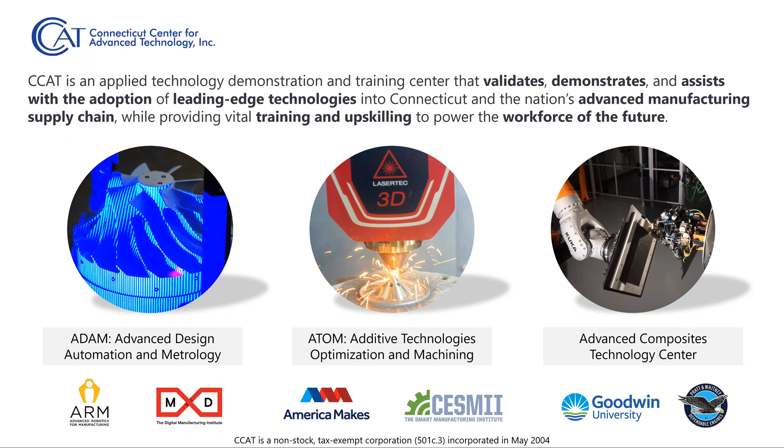So anyways, we have a diverse portfolio, and our tech centers, for those that have not seen it in person, we have our advanced design, automation, and metrology side of the house focused on model-based definition, inclusive of digital thread. So for the Naval Maritime population, we'll be digging into that this afternoon. Generative design, both for design for additive as well as what you might need in the digital model-based definition space.

Industrial IoT, we have a collection of metrology systems here, and our colleagues are going to speak to you about some of those that are in-house here at CCAT at our tech center. And then additive technologies, I've shared that we've done that for quite some time, and we have a large, diverse portfolio. So there's 7 different families of additive technologies, and here at CCAT, we have 5 plus hybrid. Hybrid allows you to do both additive and subtractive in an all-in-one machine. That is our most popular machine.

If we had 4 shifts and 5 people working that, that would be phenomenal, but we move ahead. So if hybrid is in your space, or you don't know what hybrid additive is, you're certainly in for a treat. But we're not here to talk about that today.

We're here to talk about model-based definition. So, and also digital thread.

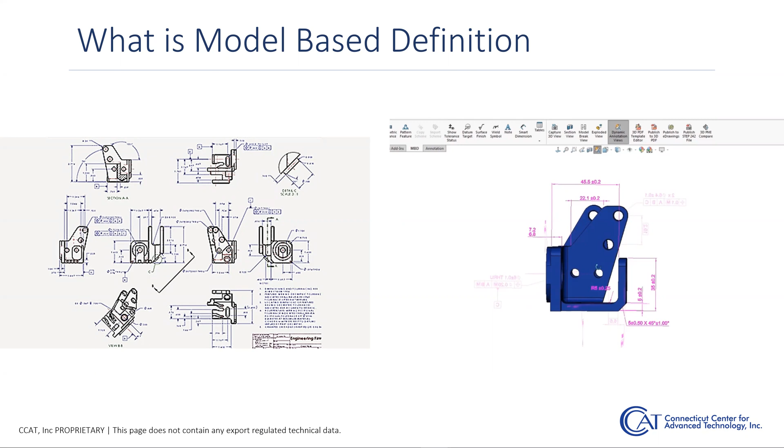What is model-based definition? To me, for the supply base, model-based definition is the consumption of PMI to automate processes. On the design side, design engineers have had the ability to put on 3D annotations for more than 10 years, right? But for you as a supplier, when you're actually looking at producing the part, the biggest benefit to you is using that data to automate processes. I'm going to touch upon some of the technologies that help you do that, and then our technology partners are going to go a little bit deeper to show you how that's done.

Once the OEM releases that technical data package to the supply base for quoting, what we are aiming to help set up is your ability to take that data directly into some kind of a data management system, such as EPDM from SolidWorks, or Teamcenter from Siemens, or many other systems out there. In a simple sense, you can think of this system as kind of like Microsoft Teams, where a Word document is housed in Teams, and multiple people can access that file, make changes, and coworkers can see those changes in real time.

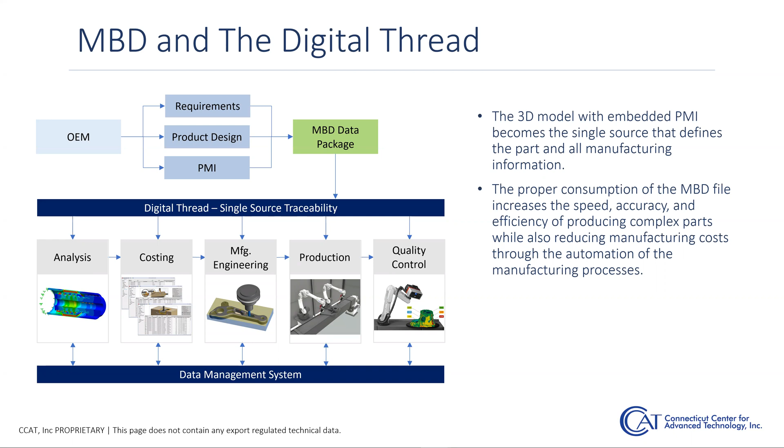And now that data that's been added to that technical data package is now available for the costing, manufacturing engineering, production, quality control. So as I said, we're going to be concentrating today on a couple of key aspects. But before I get into which ones we're going to be concentrating on, let's take a step back and take a look at the reality of digital thread and model-based definition, and really the benefit that it provides to you.

So I'm going to take the example of a particular company that exists. You may or may not have heard of a company called Protolabs or Xometry. I use Protolabs as an example because I tried them, and I wanted to see how a digital process actually benefits me as a customer. And so what I did was, I had a need to have a part produced.

My first step in order to receive a part was to upload the CAD model. And I can upload it in several different formats. Now, at the time, I didn't upload a model-based definition file. However, I uploaded a CAD model, which for me held the intent of all the design aspects of what I wanted that part to be. So I didn't have a separate drawing that specified anything extra in terms of the nominal dimensions of the part that I wanted.

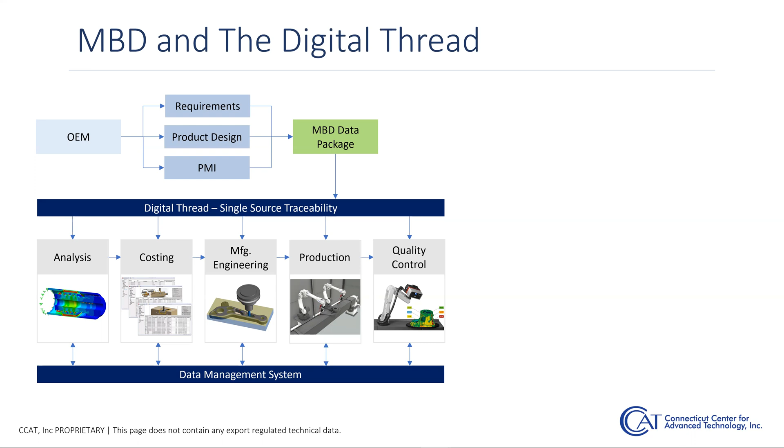So, as I said, there are many different components to a manufacturing company. And I'm not listing them all out here, but today we're going to be focusing on costing, on manufacturing engineering, and then quality control.

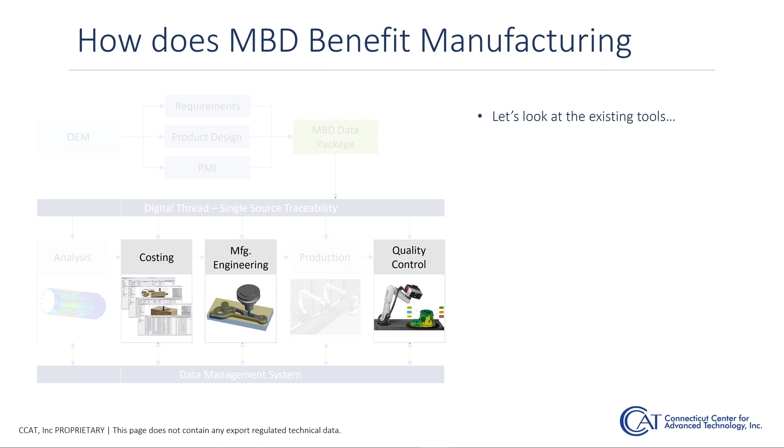Their technology can help simulate the manufacturing process. So aPriori provides accurate analysis of real-world manufacturing to provide design for manufacturing insights and cost estimates. And then you can actually simulate costs using digital factories. So region-specific digital factories to simulate process costs in various different regions of the world.

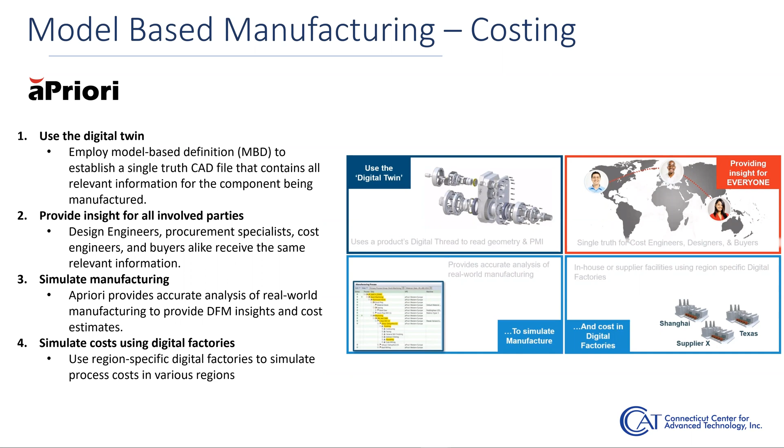So in this particular case, they have something called tolerance-based machining. And in the tolerance-based machining dialogue, you can set up different strategies per tolerance range. So what that means is that, for example, if I have a tolerance range between, let's say, 0 and 2/10,000ths of an inch, I may want to specify a strategy that says, okay, use a spot drilling operation, and then a drilling operation followed by a reaming operation, right? Or a single point boring operation.

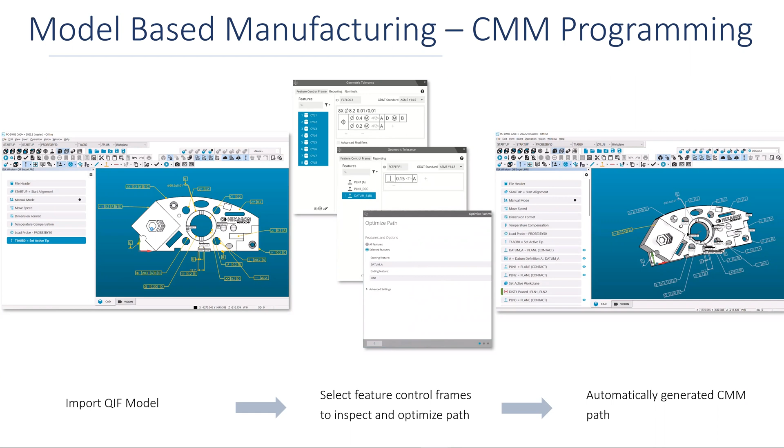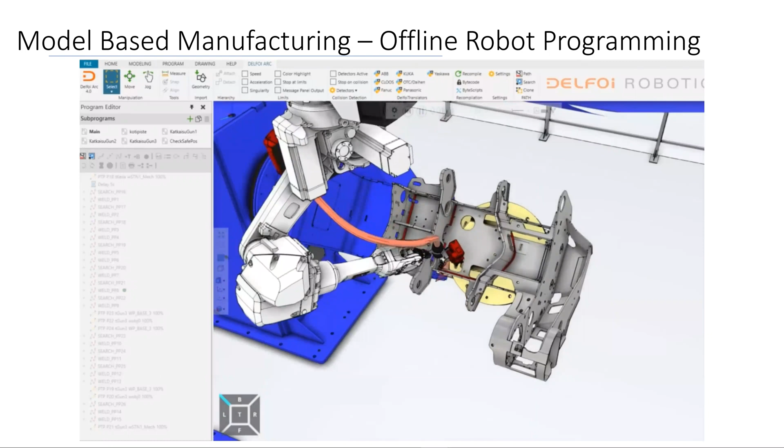With welding applications, there is software if you're doing any kind of robotic welding. Offline programming software can import model-based definition. You're going to hear actually a lot more from the Capvidia folks about this, probably more particularly during the lunch and learn. But there is the ability to import MBD files with the welding callouts, and this can actually be used to generate welding paths in an offline programming environment.

For real-time robot programming, we do have our technology partners here today, Scalable Robotics. Again, they're set up over by the additive flex cell on the Atom Lab side, and they're going to be demonstrating their solution of creating a weld path using a scanning device that's attached to the robot. It actually goes over the scene, takes a quick scan of your environment.

And then they have the ability to use a device that you see there on the right with a fiducial marker on it, and you just go and click on the seam, a couple of points, how you want that robot to follow the path, and then the robot generates that path, and you can just execute it. So it's a very, very quick and easy, and really code-free, way of programming ABB robots.

So as I said, we do want you to see a little bit more in depth how these technologies can be used to automate costing, CNC programming, inspection programming. And so we do have our technology partner with us today. I'm going to shortly invite aPriori up to talk more in depth about their solution.

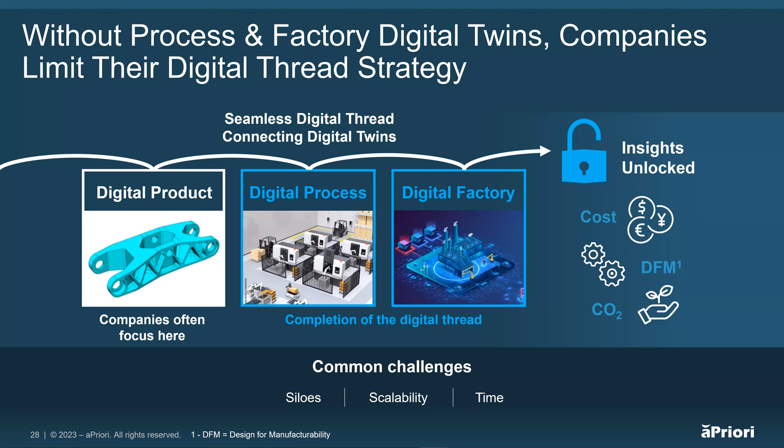So it really begins with a digital factory definition. So digital factory, basically, we have 80 different regions across the globe, about a dozen locations regionally within the States here, where on a quarterly basis, we update labor rates, overhead rates, material costs, all your energy factors. And that's a starting point. Our customers will configure those to match their capabilities, the machines in their facility, for example, their purchasing power over materials. We take that digital factory definition, and now we consume the CAD models, the parts, the assemblies, all the MBD and the PMI information on that in terms of tolerances and surface finishes, and really leverage that and combine it with our ability to simulate the manufacturing process.

So what is the raw stock that I'm starting with? How much material is being removed for every feature? That hole has a 5/10 tolerance on it. That's going to drive a reaming operation, for example. So with that simulation, we then can review these insights, look at it both from a cost standpoint and manufacturability standpoint, and take action. Ideally, early on in the process, when you can make changes interactively with CAD and see that impact to cost.

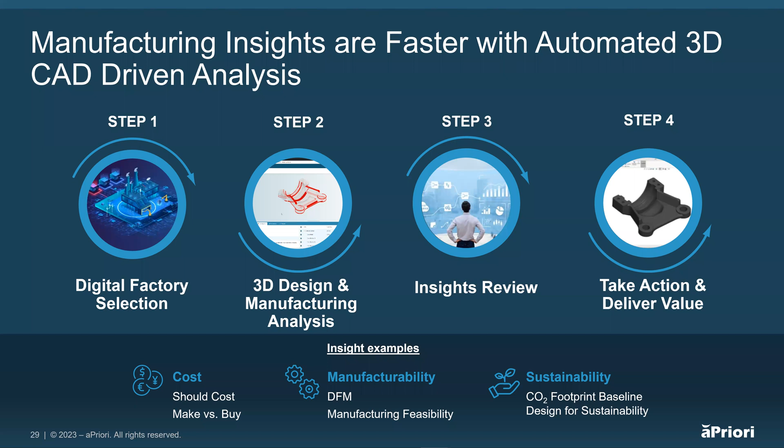So the idea is, and I'll show a short video here in a minute, but really being able to get to a detailed cost breakdown. So this part, what's the contribution of material, labor, overhead, capital investment? Is there tooling required? Is this an injection molded part that requires $40,000 worth of investment, or a casting, for example? And provide design guidance.

So young engineers, they can make parts look pretty and design great parts, but is it manufacturable? Are there going to be some features on that part? Length to diameter ratios, long skinny end mill required to get into a corner, or a sharp corner that can't be manufactured, that might have to be burnt. That kind of information. And then throughout the application, providing information on why that's a problem and how you would go about fixing it. And you start this iterative loop back to CAD to fix those issues.

And then the third block that you see here, manufacturing feasibility, right? Where is the cost in the overall process coming from? All of the equipment is being selected from the digital factory, and understanding of the cycle time, the high costs, and also looking at what equipment is feasible to manufacture the product in the most economic way. A shop may not have the right equipment.

So on the supplier side, looking at what sort of capacity is going to be required, how many hours on this particular machine is going to be required. Should I be quoting on this job? Am I really set up for it? And if I am, what sort of cycle time can I expect for this really early on in the process?

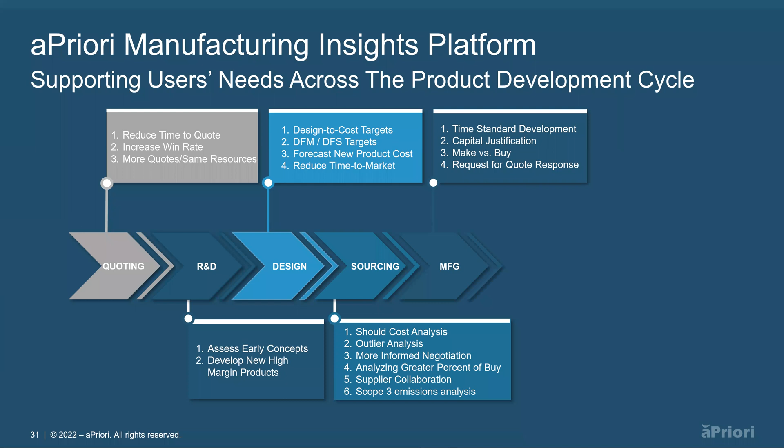On the manufacturing side, we have use for understanding, does it make sense to bring in a piece of equipment, for example, or make versus buy capabilities? You may have the capabilities in-house to build something, but you may not have the capacity, and it may be justified to send it out. So it's another area. And then, as much as everybody likes to get it right on the front end, there's always cost down initiatives, especially on long programs, 20-year cycles, product constantly being redesigned, looking for opportunities to continue to drive cost out.

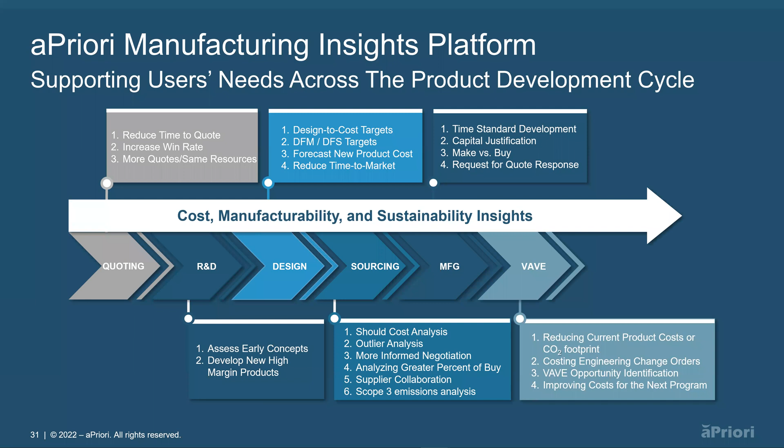So those are really the areas that we look at in terms of the application of the technology. It's really all about starting with leveraging that digital thread to provide that cost and manufacturability insight. And at the end of the day, we've expanded our capabilities, in particular over the past couple of years, to integrate with PLM systems so that when you check a design into Teamcenter, for example, or Windchill, all this analysis is happening in the background.

So all the parts are being crunched at night, and designers are now looking at automated emails where they can see the outliers, which parts are over a target cost or which ones have the biggest chance for manufacturability issues. So part of the platform is an analytics platform. So target cost, right? So here's my project, here's what the target is, and here's where I stand relative to that, so that you can make sure that you're on track and then focus on the areas that are most problematic.

The design outlier, right? The size of the bubble is the annual spend. Each one of those represents a part. It's actually a cost versus weight graph. The color of the bubble is indicating manufacturability risks. So the parts with the dark purple have the highest risk. They've got sharp corners in them, or sheet metal parts with bend radii that are too tight, that are going to ultimately result in changes coming back, or hopefully not getting to the supplier and not showing up as not being manufacturable.

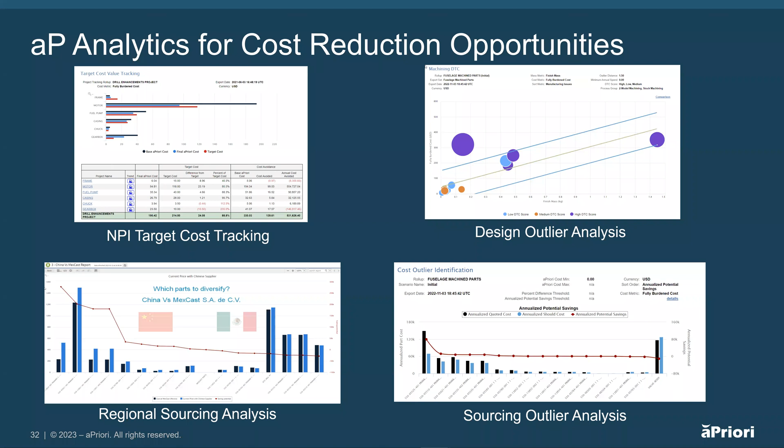And then regional sourcing, looking at all the different places that it could be sourced from. What's the most economical decision to make there? And then this last one here on the bottom right, sourcing outlier. So loading in what you're currently paying for a part compared to what the should cost could be, so that you can look at the parts that have the biggest difference. Those are the ones that you should pick up the phone and have a discussion with your supplier. Something's wrong. Maybe they're justified, but maybe the equipment they're using is way more capable than necessary. So that allows that fact-based discussion.

So with that said, let me just play a quick video here and give you a view of it in action. There's some voiceover, but I'll skip that. Let me see. There we go.

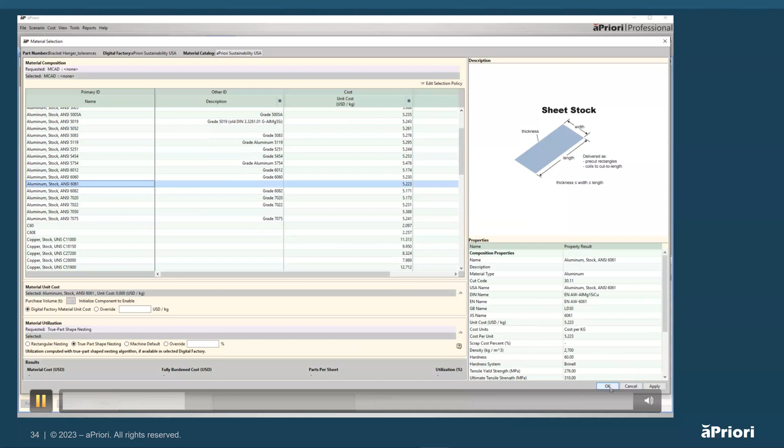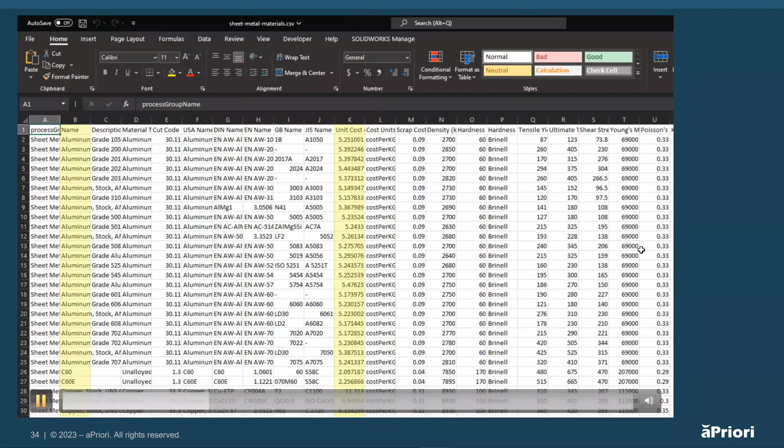So some of our customers know the capabilities of their factory, the machines. The digital factories can be tailored to specifically match a supplier if you have that relationship, that insight, or an internal factory, to really hone that factory in. And part of that is all of the materials and, of course, the cost per material, but also mechanical properties that are used in the manufacturing simulation. And all of the different grades of materials that are specific to the manufacturing process. So if I'm looking at an injection molding process, I'll see all those. All the data can be imported and exported as necessary through Excel.

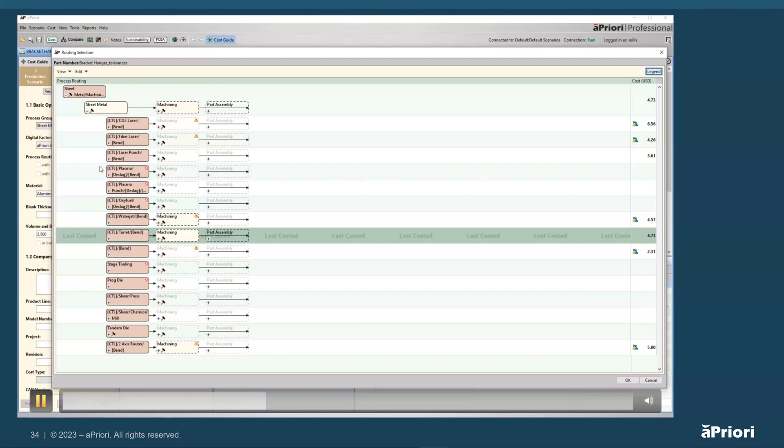And then lastly, how many am I making and for how many years? So understanding the batch impact, which can have an impact on the overall cost of the parts. And then the simulation goes and does its thing after answering those few questions. And you can see here that this sheet metal part is going to a turret press and then a 3-axis mill. So we've actually analyzed all the different ways. So is this going to a laser and a bend? All the different manufacturing processes, it looks at the feasibility and then the cost, and selects the most cost-effective approach.

So in this case here, you can see this is a list of the machines that were cycled through in order to get to the turrets here, and it's selected first off, is it capable? And then the most appropriate from a cost standpoint. And you can see the cost breakdown here with material, labor, overhead, all of your cost breakdown. If there was a capital investment as well in terms of tooling, that is captured, basically within a couple minutes of pulling the CAD model in and running it.

The design guidance provides information on potential manufacturing issues. In this case here, there's an edge proximity. So I've got currently 2 millimeters, it's suggesting that you're at least 3 millimeters from the edge. And here's why that's a problem. So that gives that insight to the young engineers that may not necessarily have a full understanding of all the design rules. And here you can see the MBD.

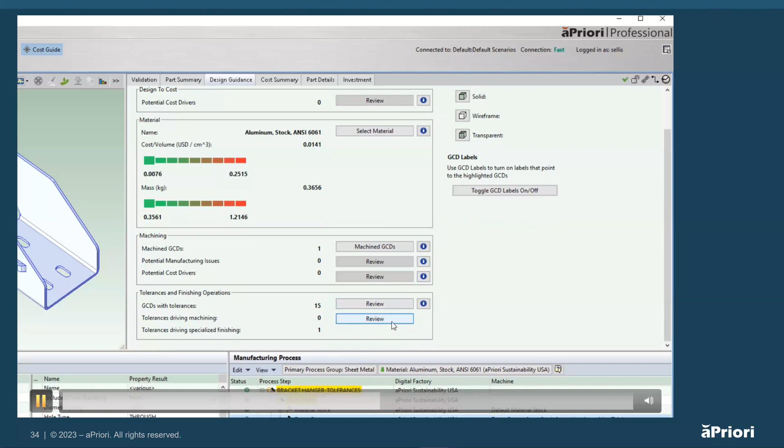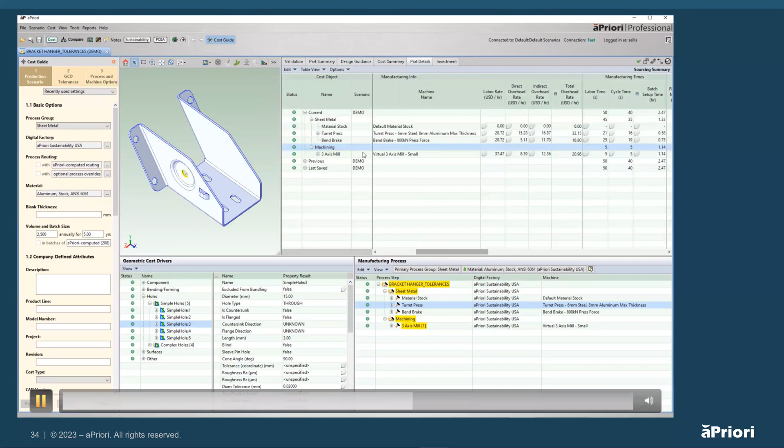So tolerances were pulled in, and this machine, the turret, can hold a 0.07 millimeter, but the tolerance is at 0.02. So that drove a reaming operation on a 3-axis mill. So if I could loosen that, I could eliminate having to get that to the 3-axis mill, the setup, and all the cost associated with that.

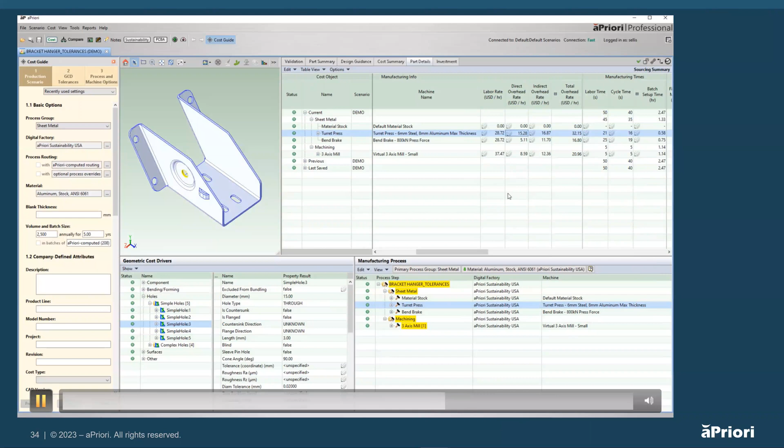And all of these assumptions that are made from the cost model, sometimes you'll want to dig into the details. All the detail, in this case the overhead breakdown. So the energy cost, depreciation cost of that equipment. And if I want to go in and have a discussion with a supplier: okay, instead of $28, you're at 40, okay, I understand the reason why, and update quickly to understand that.

And then here, lastly, jumping into electronics. So that's a big space for us as well, PCBA and wire harness. We integrate with a system called SiliconExpert that you load a bill of material into, and this system provides feedback on minimum and average price for those components.

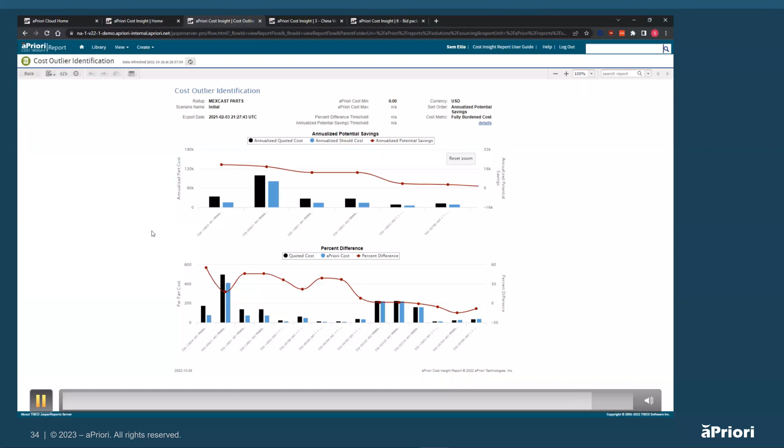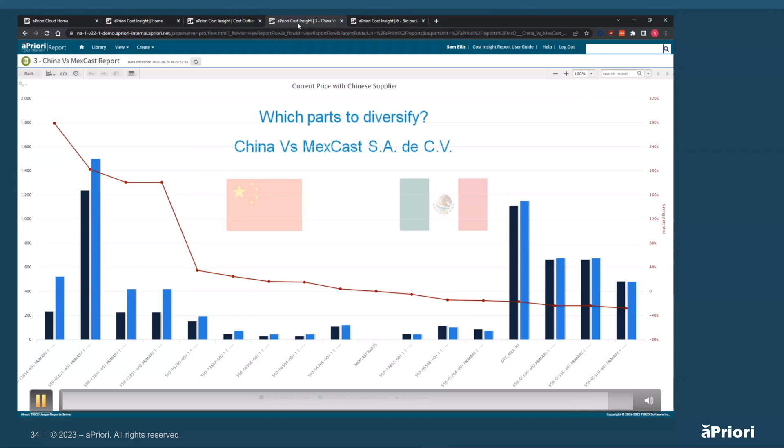And then it kind of wraps up with, okay, we've analyzed all these parts in the simulation. Let's now make some decisions around it. Focus in on the parts, in this case here, should cost versus quoted cost to know which ones you're overpaying for, or here an analysis of China versus Mexico on a variety of parts. Does it make sense to reshore?

So a quick overview, but the idea is really to leverage the model-based definition and the digital thread to provide cost and manufacturability feedback early on in the process for a variety of use cases. Thanks.

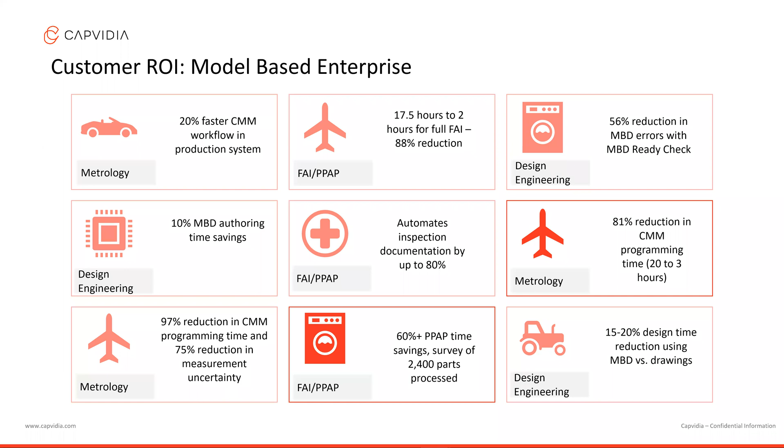But especially today, we're going to start on a real high-level workflow that Rudy's going to show, which is usually kind of a first step of how you could start to use model-based definition and derive some value for your organization. Just a quick background on Capvidia, on our products. So we'll be focusing today on our MBDVidia technology. We also have our CompareVidia technology, which is a comparative validation and CAD checking tool.

Basically, the idea being that if you want to use the model as your single source of truth, you want to make sure that it's a high quality model, since you're basing so many processes off it. So that's what CompareVidia is focused on. But today, again, we'll be talking mostly about our MBDVidia technology.

An important aspect of model-based definition is standards. Something that you'll hear a little bit about today is the QIF standard, which is an ISO standard that helps to tie the design world, so your CAD and your PLM product definition data, to your quality data, which is your as-built data.

So, at the end of the day, what this helps with is you have your as-designed model, you have your as-built data, and this is how you unify these things. So you hear people talking about digital twin. This is one of those ISO standards that's out there that really helps you realize that. And with that, I'd like to just pass it along to Rudy, and he can kind of walk us through this workflow.

Thank you, Daniel. All right, guys, we'll spend a little bit of time going through the workflow here that Daniel was talking about. I have a quick video. I'll just browse through this chart real quick. So we're going from the CAD all the way down to CMM inspection. That's where the guys from Hexagon will be taking the presentation, showing you what and how the inspection will go and sourcing that MBD data. So let me go to the next slide here.

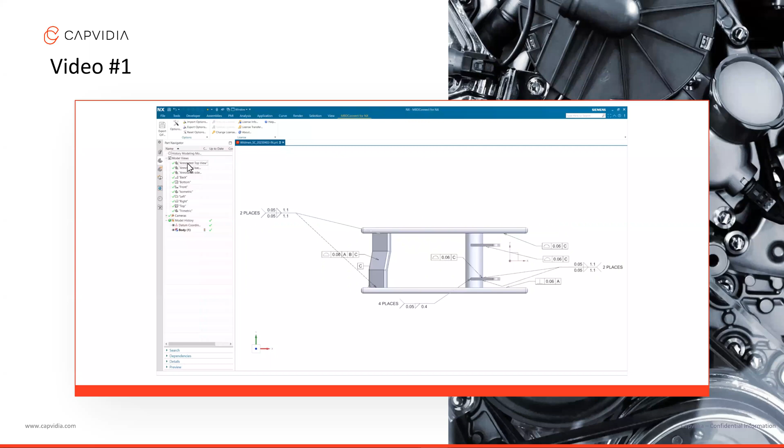Perfect. Okay. So we'll start at the CAD level. In this case, we'll be showing NX, but this can be done in any CAD. It could be SolidWorks, it could be Creo, CATIA. We're bringing in a CAD, and once again, it's MBD, right? It's all defined in the 3D space. In this case, just to highlight, we do have welds, just specific for this model, just a weldment. You saw the demo done by the guys at Hexagon over here. That's the part that we're showing here, right?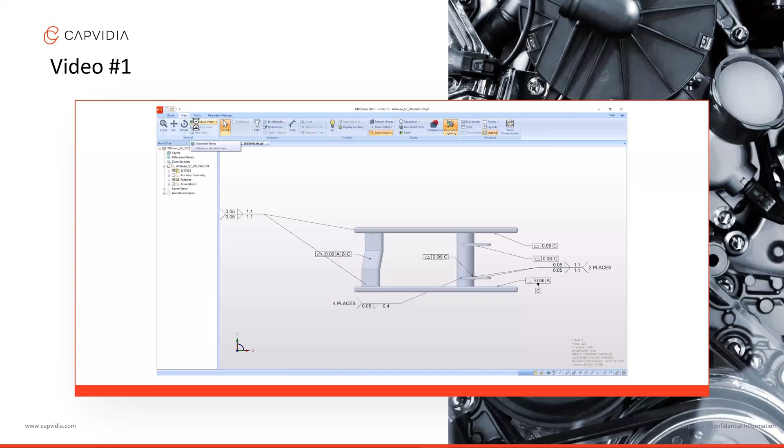Importantly, we're going to be exporting this file as a QIF standard. That was what Daniel was talking about. This is a standard that brings in the CAD and also the PMI. So all the GD&T will be all put in one single file. After that, we're going to be bringing that over to MBDVidia, which is our core software. You can see here, we're just having the same exact CAD geometry and the views and all the GD&T that you saw at the CAD level, in this case, NX. All the views are shown there.

Now to highlight is that after that's been done, we went ahead and characterized each one of these items. So now each one of those GD&T callouts has a designation, a character number. Very important to show, and I'll show it again in the next couple of views, is that each one of those holes that you saw, there's 12 holes, has a sub-character number. So it's going to be traceable throughout the workflow. Very good. There we go.

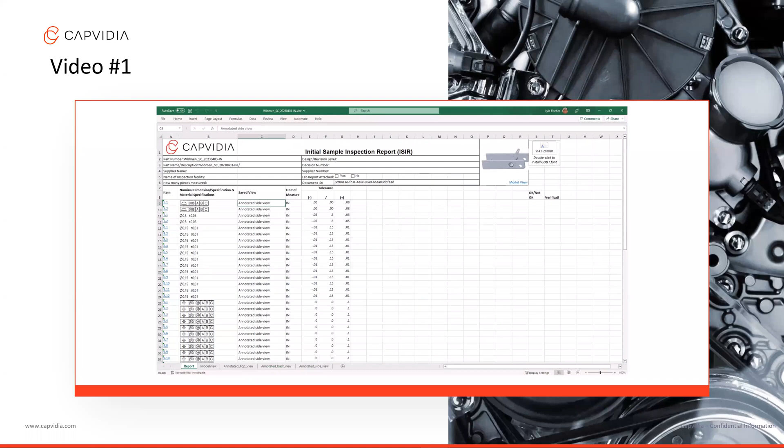After going through this, we're going to be exporting this into Excel. This creates an inspection plan. So if you guys have worked in quality, you've seen these extensive inspection plans where it includes all the dimensions, the results and everything. It could be an AS9102 report or just a standard format that you may have at your company. But what our software does, it actually exports that automatically into any format.

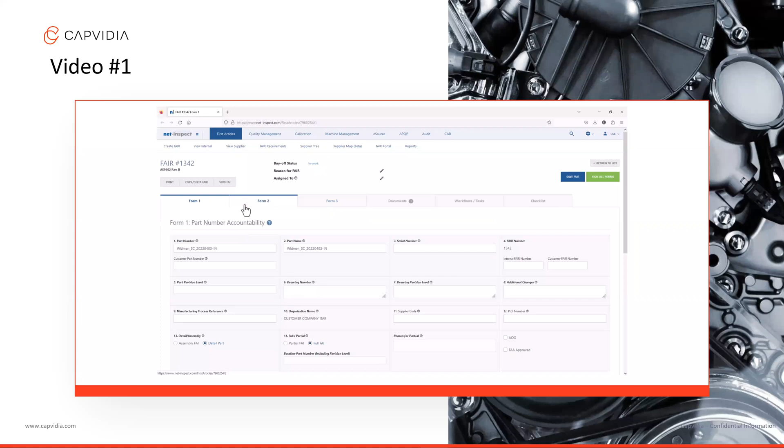Also, what we're showing here is this is exporting the data over to Net-Inspect. For those of you that are not familiar with Net-Inspect, Net-Inspect is a cloud-based QMS solution, and it pretty much automatically pushes all that data, all the GD&T, no manual input, up to Net-Inspect. This is very useful for your supplier base. If you have suppliers, they can submit their first article inspections to Net-Inspect, and you can approve directly from there. So we work together with them, and we have a very good relationship to manage all this data.

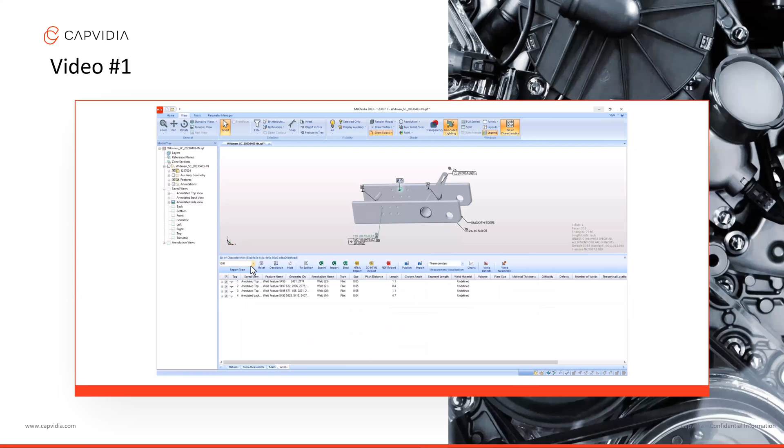So at this point, we'll bring it back into Capvidia. Really, the process could go either way. But here we want to show how we are segregating the welds as a different tab inside Capvidia, meaning that we can really show how these welds could be managed as a separate inspection point, separate inspection plan. So potentially at your facility, you have a different group manufacturing welds and inspecting welds. So that's why we show it as a separate segment. It could be combined if you wanted to, but it just gives you the ability to really manage your inspection plans as you want to.

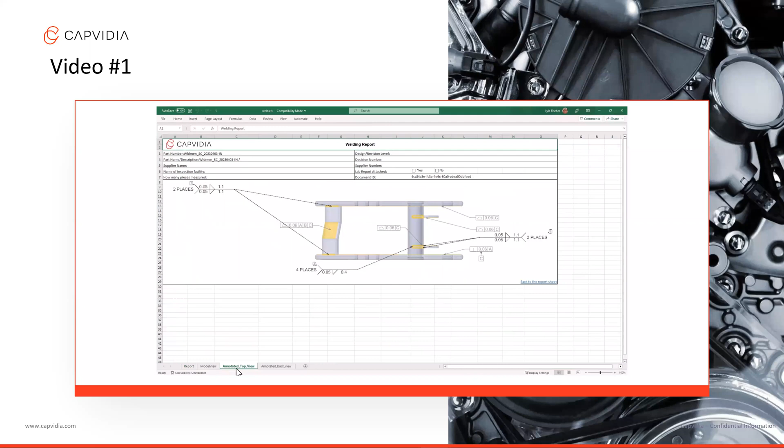Right, so we're just showing a quick view of how the Excel sheet has the data and it shows the views, making it very easy for an inspector to really review the information. From here, once again, showing the welds there too as well.

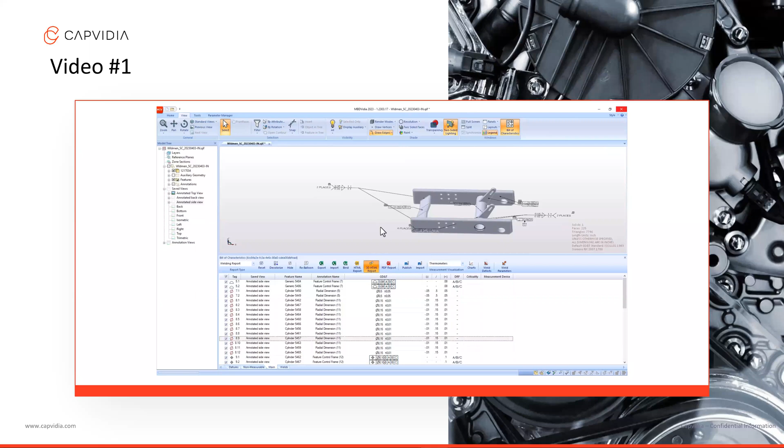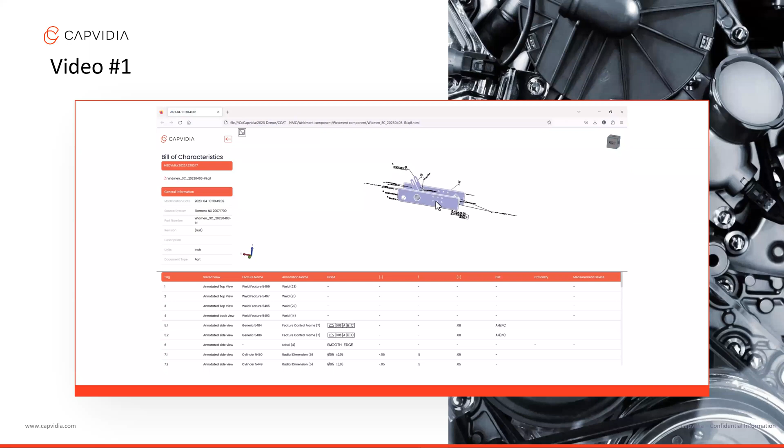And from here, we should be moving along to the other way of showing the data for the inspectors, suppliers, which is our lightweight view. Well, it's a 3D HTML. So from Capvidia, you can export this 3D HTML. And this file can be used to visualize your 3D MBD, your model, your bill of characteristics, which is kind of like the list of features that describe the model.

You can see here, you can rotate it. This can be opened in any browser, so you don't have to download any software or anything like that. And you can really visualize all the GD&T and how that's referenced on the actual feature, on the actual model. So once again, to highlight, right here, the software went ahead and characterized each one of these holes individually.

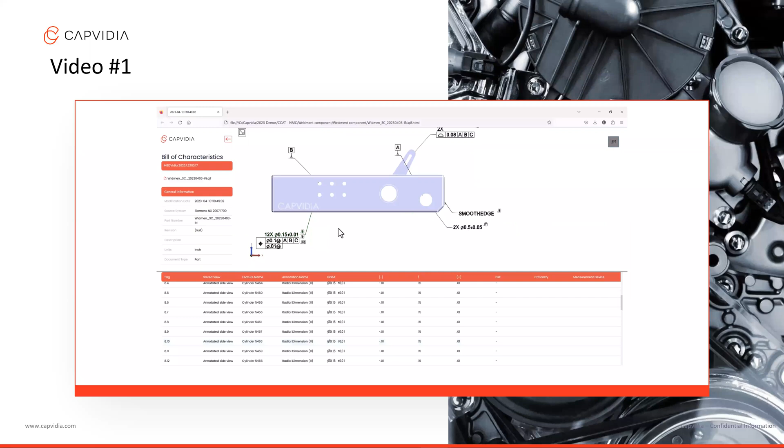So if you think about it, throughout the workflow, that hole, B.1 hole, that hole on the left top-hand side, that'll stay the same reference. So you have 10 serial numbers, they're all going to be compared to that same reference. So you're always keeping the same reference feature.

And after that, we would pretty much push this over to CMM. For example, we're using PC-DMIS at this point, and that QIF file that was generated from CAD can be directly imported in PC-DMIS with minimal manual programming. So we'll take it over to the PC-DMIS folks, and they can actually show a quick workflow of what happens there. Then we'll bring it back to us and show you a little bit about data harvesting.

Hello, everybody. My name is Sean Grady. I'm a local sales engineer here for Hexagon Metrology covering Western New England. So I'm going to be going through the slides here, give everybody a brief overview on Hexagon, and then more of the technical side as to how to import that model-based definition into PC-DMIS and go through the necessary steps.

For those of you who aren't familiar with Hexagon, today we're talking about the quality aspect of Hexagon, but we're also into design and engineering software as well as production software. And we've been making great strides over the past couple of years to try to get all of these three divisions to talk to one another. So as we start measuring something on a CMM, if there's any offsets that need to be sent back to a CNC machine, we can handle that, as well as send some feedback back to the design engineers and help close the feedback loop for our customers.

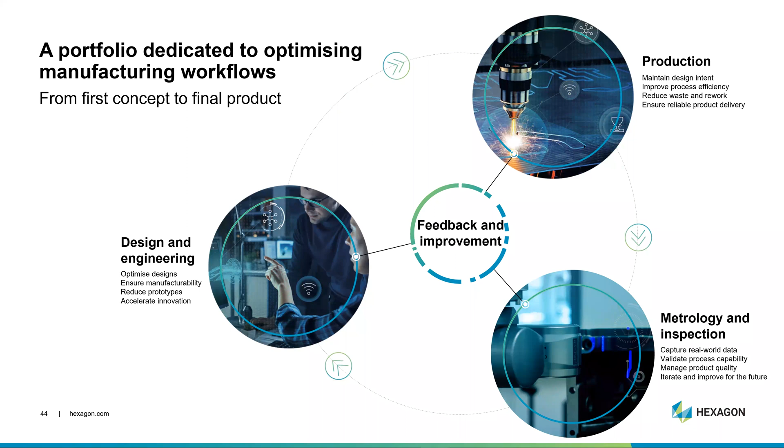A little bit more of a background on the design and engineering. Here we get into helping design structures, acoustics, some virtual manufacturing, materials, system dynamics, as well as some autonomous, simulation, physics, and applied solutions. On the production side, we have software that helps do the machining, mold and die design, sheet metal fabrication, woodworking, simulations for the CNC machines, as well as in-process inspection. So we have sensors that can go inside the CNC machines to help inspect at the CNC and gather information.

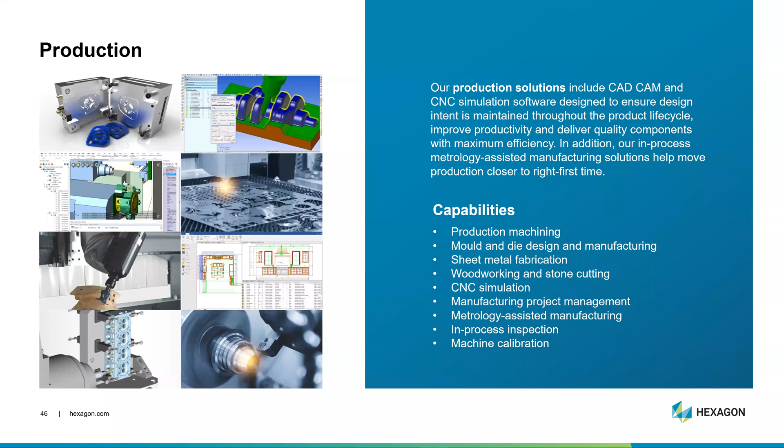And then most of you are probably familiar with Hexagon from the metrology slash quality side with the CMMs, with a wide range of different machines, such as the standard bridge CMMs, the arms that we saw earlier today, as well as some CT machines, automated inspections, structured light scanners, and other things.

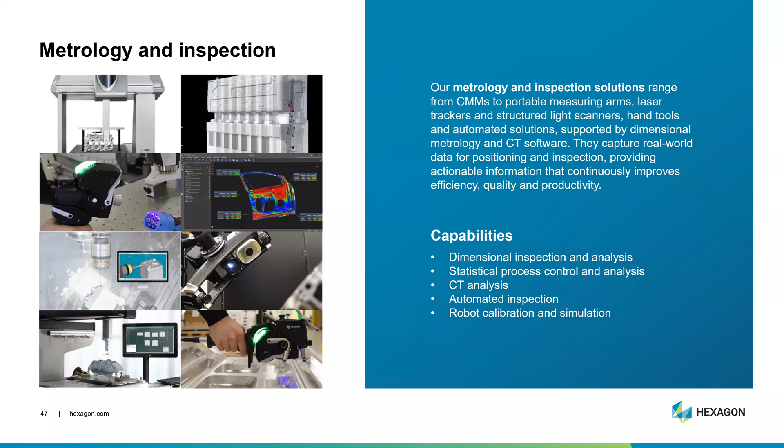Another little background on Hexagon is we're a very global company. Here you can see the breakdown of where we are positioned across the world. We have over 8,000 employees. We take 10% of our net sales and put that back into R&D every year. We have more than 500,000 software licenses installed, and we have over 2,800 different software developers and engineers to help always add new tools to our portfolio.

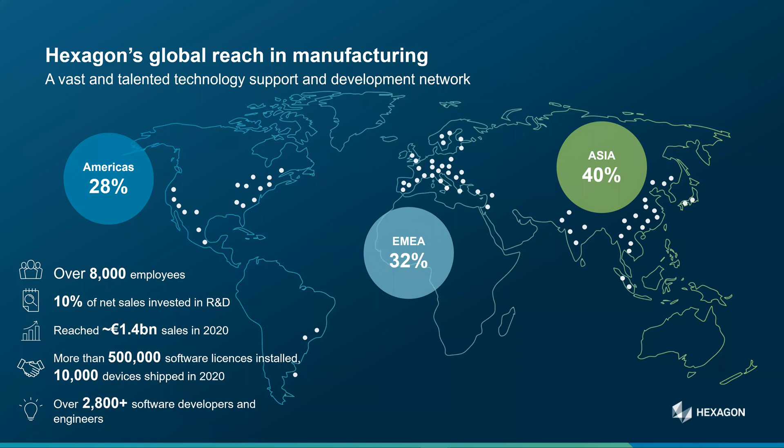So today what we've been talking about is the model-based definition. So here's an example of how our current workflow is in a brief snapshot to deal with the PMI. But in a lot of cases, for people out there who are familiar with CMMs, typically you might be dealing with having a part, a drawing, and a CAD file.

And like we've discussed earlier, somebody would be basically interpreting that drawing, deciding how to measure the features, typing in information for your tolerances, and anytime there's an operator involved, there's human error. I'm a former application engineer, so I can say myself that I have fat-fingered the keys at times.

But this is where the whole model-based definition comes into play to help eliminate that stuff, as well as to create a program fairly quickly for your inspection process. So we typically start by importing a file. PC-DMIS has some tools to generate the GD&T.

We then have certain methods and strategies to measure certain types of features, depending on whether it's a circle versus a cylinder or a plane. PC-DMIS will then execute and capture the results, and then we can output the data into a few different formats.

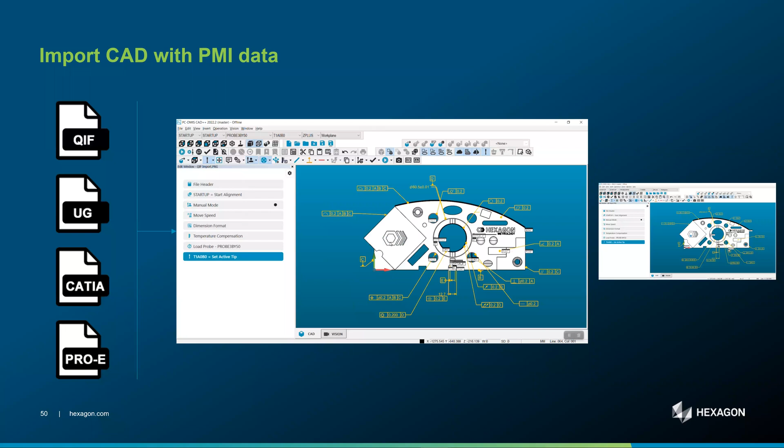So on this particular slide here, what we're seeing is the importing of a QIF file, UG file, CATIA, Pro/E, SolidWorks, any native format that has the embedded GD&T within it. Here we're bringing in a particular file, and as soon as we do, it automatically recognizes there's n number of entities within that file, and you have the ability to simply accept that information and create all those dimensions and features for you.

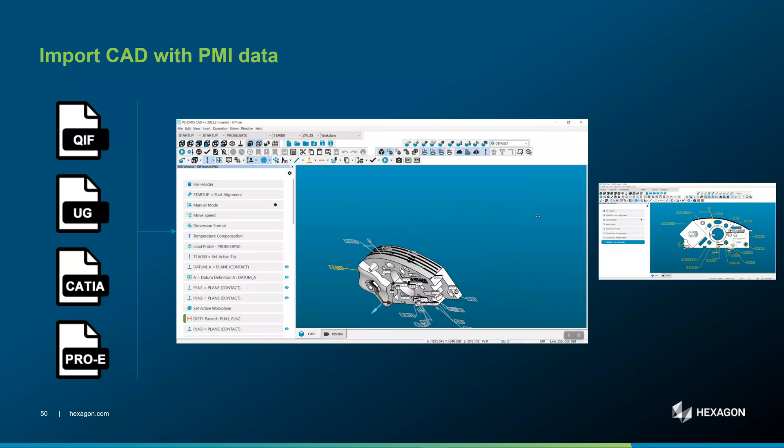So in this particular case, we see that a program has been generated, and we now would have the ability to run this particular program. Now, in some cases, we don't necessarily want to do exactly that because we might be aligning something a little bit differently one way versus another, going off of a fixture or something along those lines.

And that's where the next step comes into play here, where once we import the model, traditionally what we end up doing is looking at the geometry in the different views that we have to work with. And by using the shift key plus the left mouse key, we can hover, and you can see in the animation on the right, the necessary dimension that we're interested in.

And simply by clicking on that, it's going to bring up a dialog box to enter not only the feature, but also that dimension with the associated tolerances into the PC-DMIS part program. And that's what we're seeing here at the moment. So in this case, it's a circularity that they're working on. And then there's also a perpendicularity that they have here.

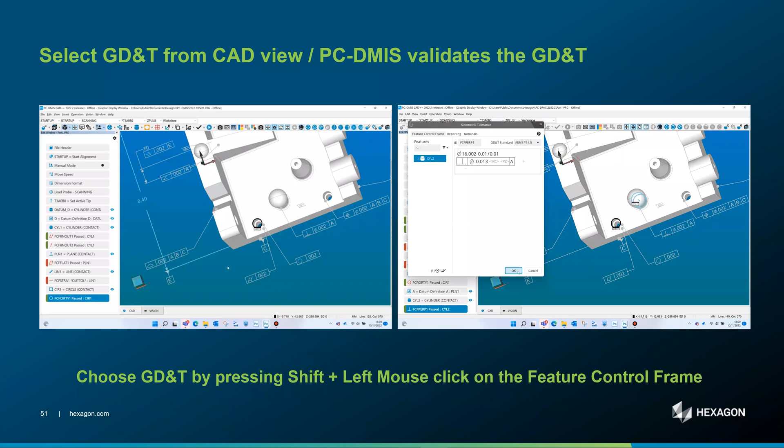So how do we handle the different types of geometry? Well, like Nasir had mentioned earlier in his presentation, certain softwares use certain measurement strategies, and that's how PC-DMIS handles things. So the user can define, okay, if I'm going to be measuring a cylinder, I want to measure it a certain way most of the time. And so you can define whether you want to probe it, whether you want to scan it, how many points you want on it, how many levels, those sort of things. So basically you're defining all this stuff up front.

So now as you go and click on the geometry, like we can see here in the particular views, we can just simply hover over the feature, and PC-DMIS recognizes whether it's a plane or a circle. In this case, it's going to see a couple cylinders here. And by left mouse clicking on it, it's now going to add those necessary parameters. In this case, it's a cylinder taking n number of touch points at 3 different levels into the program.

But with our systems, we have many different sensors and configurations. So depending on what you're using for the CMM, you can take individual points, you can do some drag scanning, you can do a bunch of different things. And that's, again, what we're defining here.

So what'll come up in just a second here is if we want to measure some circles, we can click on those individual bits of geometry, or we can utilize this CAD file and just simply highlight a plane that these features are all embedded in, and then it'll recognize all the necessary circles and write the program for us. And that's what we're seeing over on the left-hand side with this particular view. So just bear with me for a second as the video goes through.

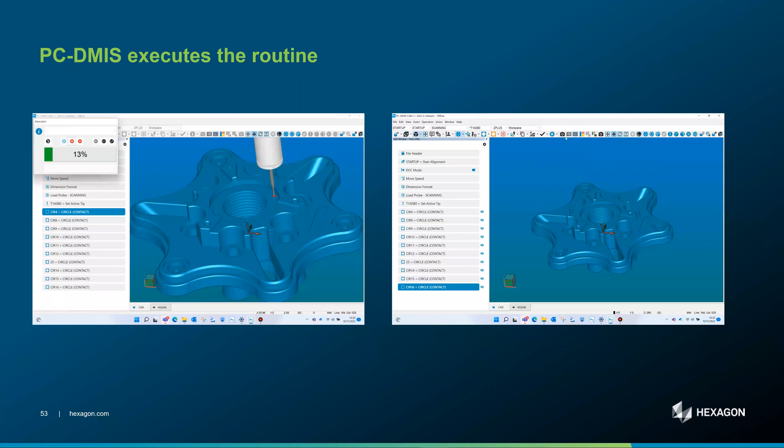Now, you always have the ability to go and edit things if your strategy isn't necessarily going to work with a particular feature, but it works for 90% of them. You have some quick and easy tools in order to do that. And you'll see that in a video that I have at the end.

Once everything is captured, we have the ability to send it out to a number of different formats. In this particular case, we have a standard PC-DMIS report. We have the Net Inspect that we were talking about just a few minutes ago. And then we also have our own Nexus metrology reporting, which is like a one-stop hub in order for other people to take a look at all the data.

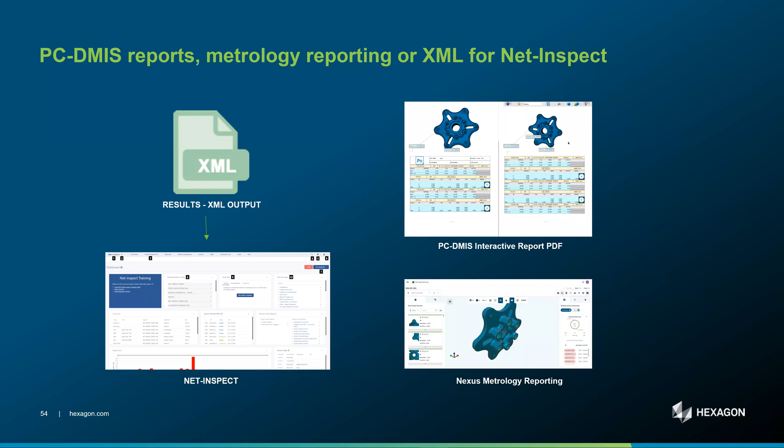This last one here is we're showing that example for the Excel template from Capvidia. In this particular case, some customers might want to run an existing program and after each one, create one particular report for that part. Other customers might want to have a run where multiple part runs are all embedded in one particular file. And that's what we're doing here.

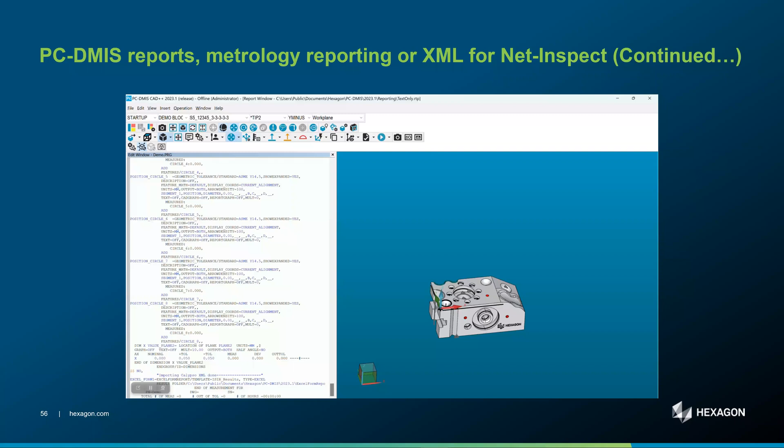So you can see we have part number 1, part number 2, part number 3, all embedded in this one particular file. And this is what will eventually, in a few minutes, get sent back to Rudy to show the tail end after we've captured the information from PC-DMIS.

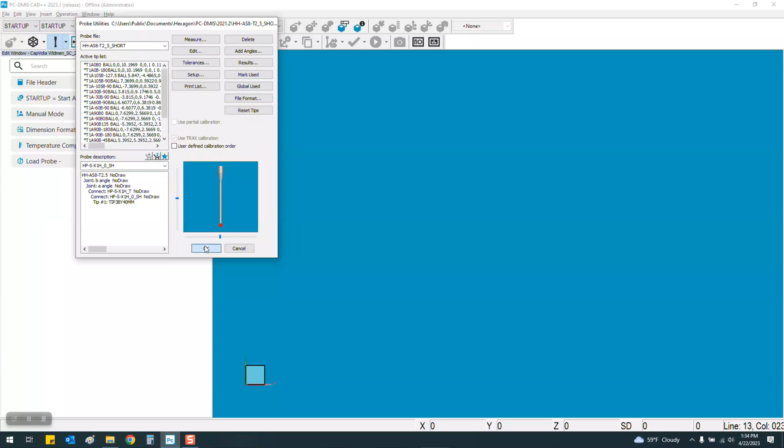Now, this video here is a start at the beginning of how this works within the software. So basically, we did a file new. First thing that comes up is our probe information that we're seeing here. So I'm turning off some of the graphics for the probe just to make it a little easier for us to see when we import that QIF file.

So once we bring this in, we can see it has so many entities, but I simply turn that off so we can look at the different views, because sometimes there might be a lot of stuff on this particular file. So we have a top view, a side view, a front view in order to interact with it.

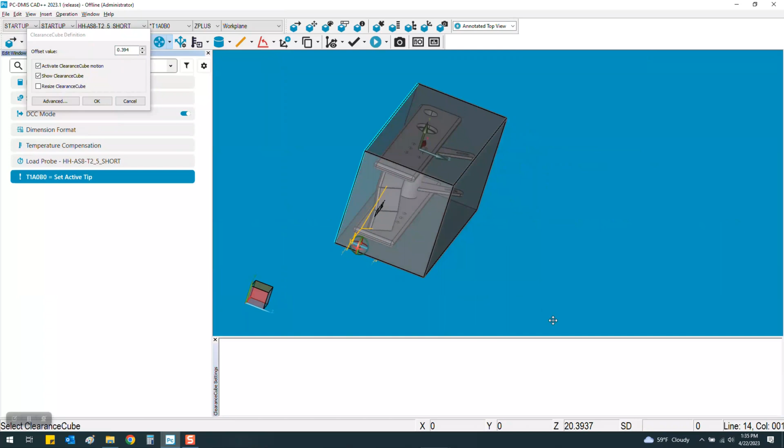We also can set up what we refer to as a clearance cube. So this is basically going to be a safe zone or position around the extremes of the parts that we can resize, so I don't have to worry about movement with my probe. Now, all I have to do is click on the dimensions. It's going to add them into the particular program. And now the machine is going to be handling all that particular aspect of it.

So what I ended up doing here was I clicked on Datum C, and I didn't want to use one of those direct strategies because the part has a lot of obstructions here. So I'm actually choosing the particular path in this particular case just to show some flexibility on that particular plane.

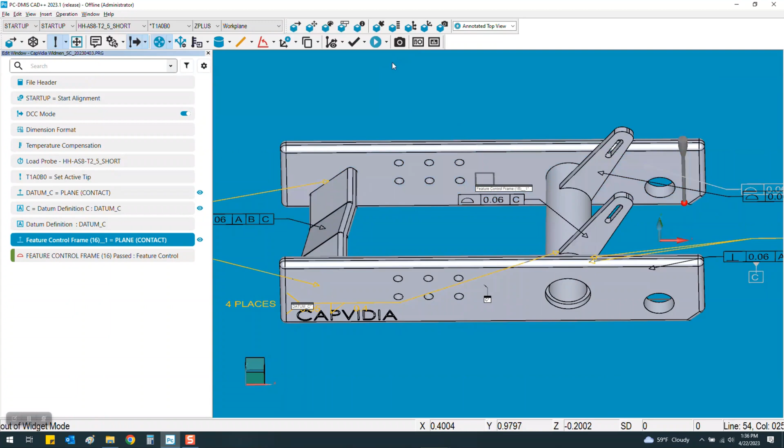Now, when I go and click on that other dimension, the same sort of thing. In this particular plane, I simply want to go down and I'm going to take individual points, and this is where the machine is going to go. So I'm basically just setting up a path to avoid the different bits of geometry. At that stage, I can just simply click on some features and in this case, use the strategy. I don't have to do anything else because it's a very simple measurement that I have full access to.

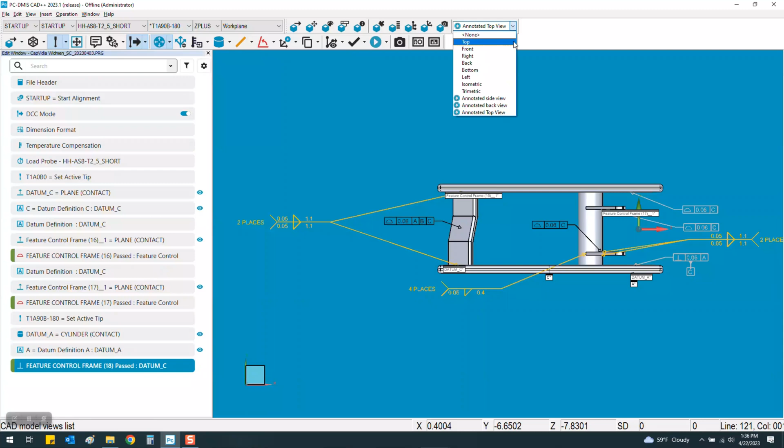Now, in this particular case, I'm changing my probe to orientate. So I'm now going to be able to measure stuff on the front face. And so I'm just changing the view. I'm going to capture these distances. And again, these are certain planes that are not well-defined geometry. A plane infinitely can go on forever.

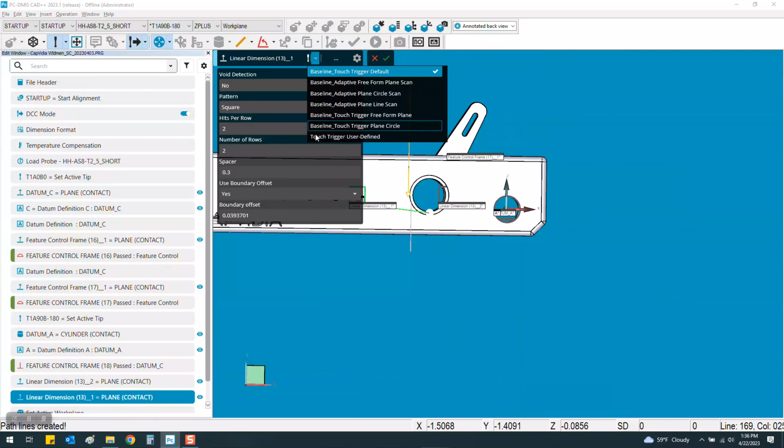So I want to take specific points, especially on this little tiny step here. So I'm just going to accept that there. And then when I go to measure this other plane that was part of that distance dimension, I'm again going to choose my individual points.

After we have this, we're going to change the view so we can then see some of the different datum features, such as the 12 holes that make up that pattern, and one of them is datum B. So by clicking on that, it's going to add all 12 holes into the program. I'm going to be stepping through just so you can graphically see it go around and show you where all the information is on these particular features.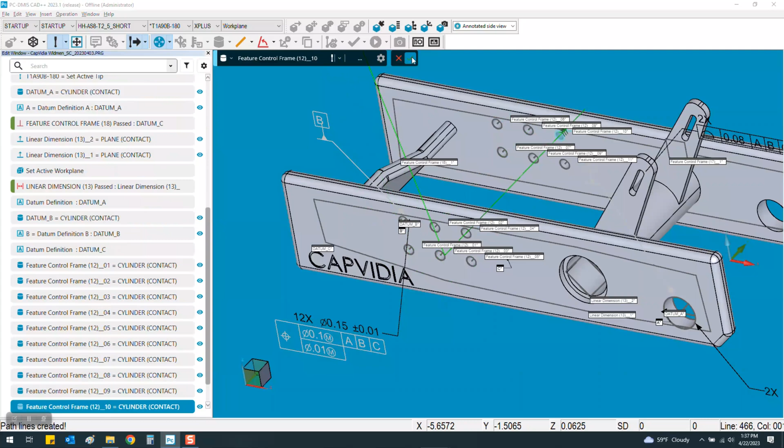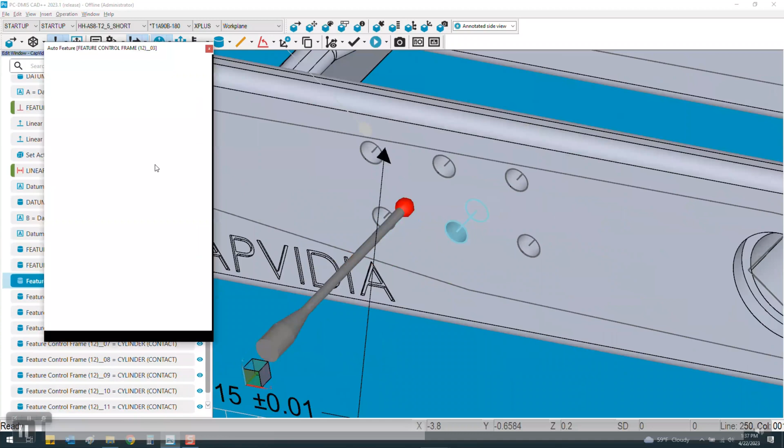And I can see right here from my background in programming PC-DMIS that it looks to me that these circles might have all been created in one direction, sort of just punched through the particular part. So I'm going to do a little bit of editing here. PC-DMIS has a lot of flexibility to quickly edit things. So basically what I'm doing is I'm just simply flipping the vector, which I grabbed directly off the CAD file, to come out of the part towards us, because that's where our probe is going to be sitting. So I'm just going to edit those 5 or so holes.

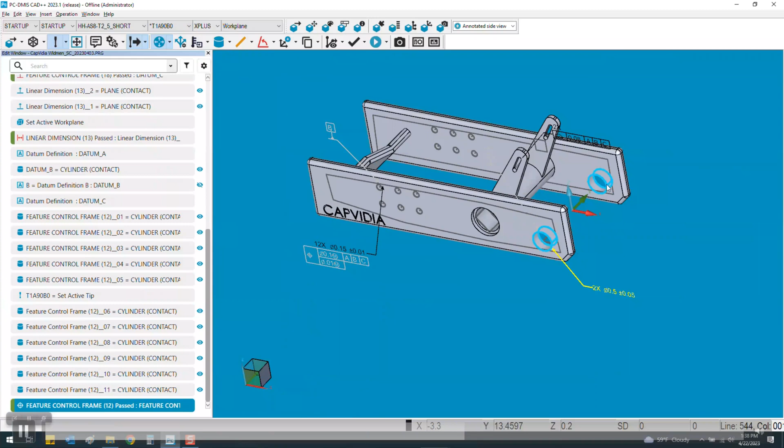And then we can move on with the program where we now are going to capture the 2x diameters, actually holes on the backside first. Nope, that one there. So I'm going to be grabbing that one and then the one on the backside. So again, the same sort of thing. If this hole was punched all on one side, we're simply going to flip it so it's coming from the opposite end of the part. And I'm adding one dimension here so it shows up on the report.

And then what I can do is rotate this probe back down to capture the last couple of dimensions, which are going to be these particular profiles with our 60 thousandths tolerance, one just to C, one to A, B, and C. So we got this one here, just accept it, and then that one there.

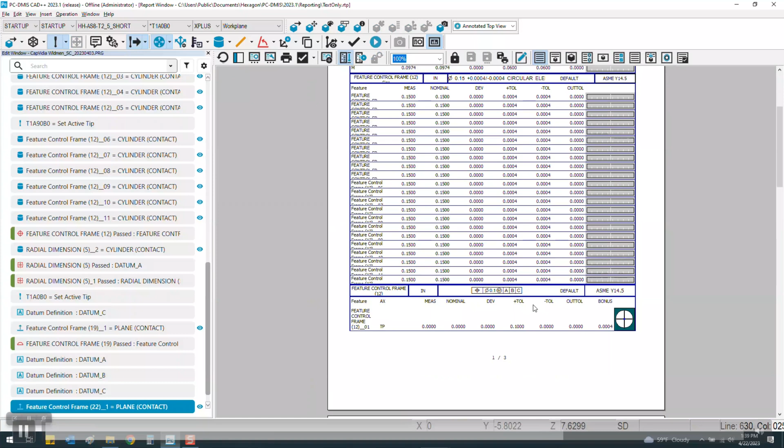So what the model-based definition is doing for us is that this process would take quite a bit of time, to add everything, make sure that you got all your nominals, your movement and everything created. But you see here, now we have a program written where we have the tolerances and nominals directly coming from the QIF information with that embedded GD&T.

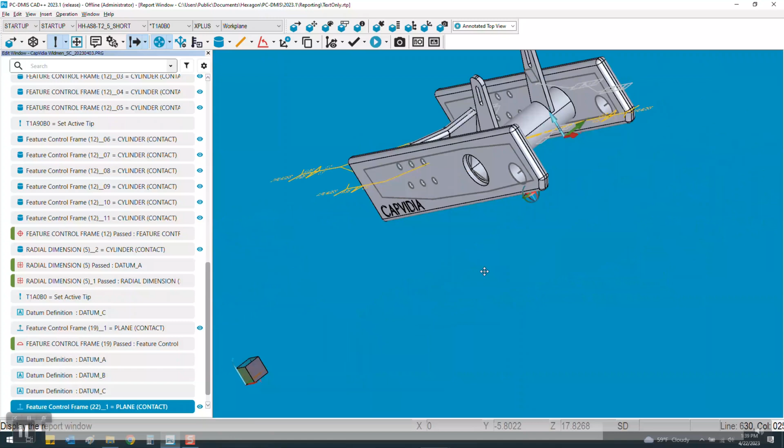And at this stage, it's a matter of, all right, let me close that. I'm going to zoom out a little bit and I'm going to reactivate all my probe components so I can see not just the stylus, but the probe sensor, the wrist, and now I could run an animation and look at any sort of collision detection. So in this case, we're just simply running the program. And as you can see, it's going to that safe zone. It's now following the path that I had created with those individual points for these 2 planes.

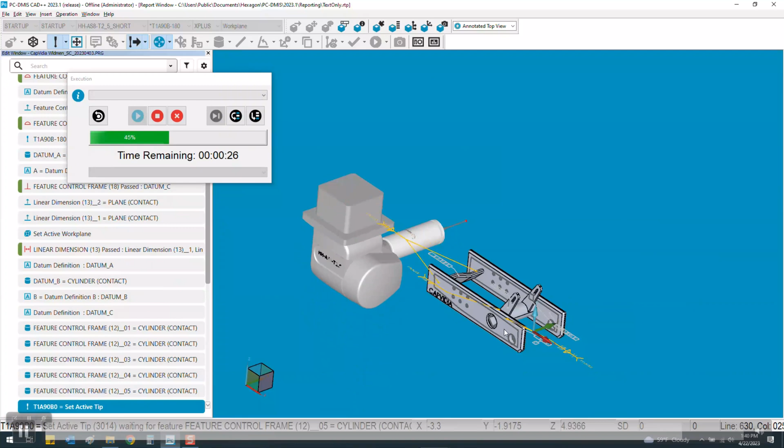Here's the plane on one side. There's my probe rotation. So you can see it will come up and over the part. I don't have to put any of this movement into the program. Going to take the individual points. Now it's going to measure the cylinders on one side. It will then come up and over, rotate, go to the other side, come back down. And then at that point, we would have a report with some measured data, which then we can pass back to Capvidia for the NetInspect.

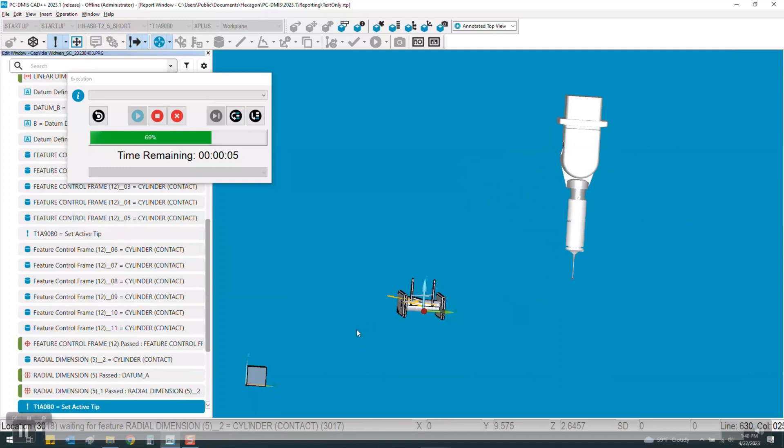So as you can see, we programmed this part in just a couple of minutes. And at that stage, again, a report was created and we will be passing it back to Rudy.

Thank you, Sean. How are you doing on time? All right, guys.

So very quickly, just wanted to summarize this workflow. We went directly from CAD, full MBD definition, all the way through creating your inspection plan, creating a lightweight viewable that could be used at the supplier base at your shop, going all the way to actual inspection, minimal touching of the programming. So everything is done very quickly.

And that's, I think, the key point to take here, is that there's minimal intervention from an operator like it used to be, where you had the drawing, type in your dimensions, program your probe, etc. So you're really minimizing the amount of work you're doing. Let's see, the next one is a quick video on harvesting the data.

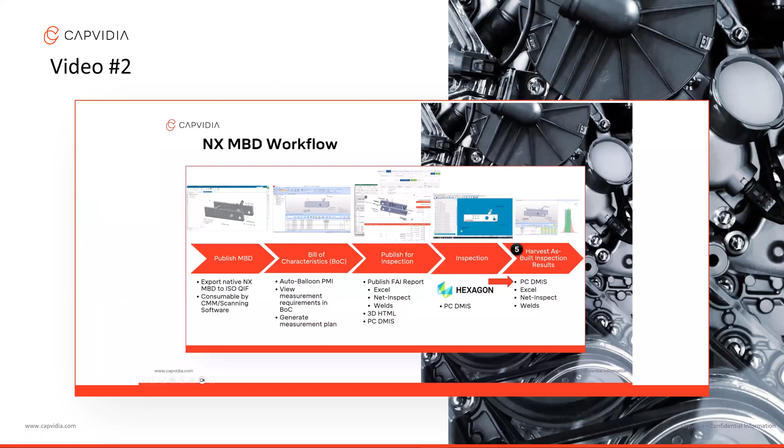And what that means is we're grabbing the data that's been inspected, and that data is going to be brought into Capvidia. We'll show in a little bit. And it could be used to compare, to analyze, to make decisions. And this could be pushed all the way up to engineering, where the engineers can actually see what having this data means, right? Oh, should we change our design? Should we open up the tolerances?

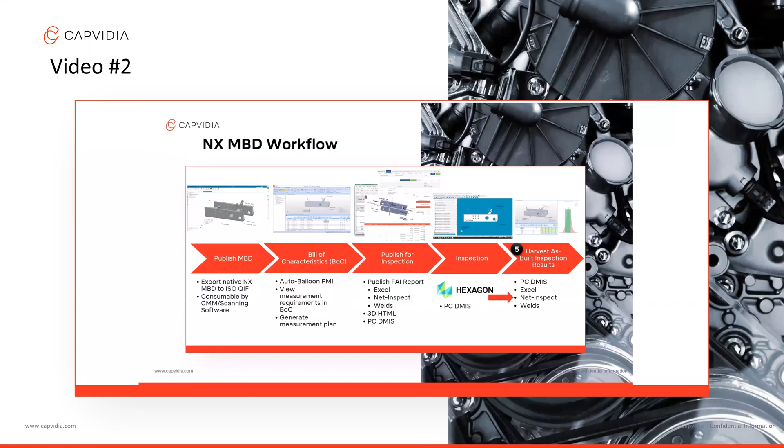The intention here is to make this closed loop where engineers can actually see the data and say, oh, wow, this is what the actual part is. Because a lot of times inspection data just ends up in a hole and nobody knows about it, right? So we want to close that loop and have engineers see it. Once again, that data can be brought in from PC-DMIS, from Net-Inspect as well.

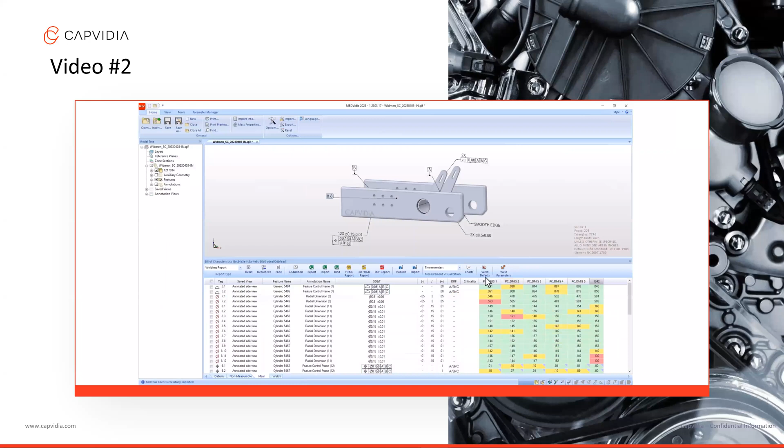And you can see here, there's several serial numbers shown. And as you click through each one of these holes, you're going to see different ways of displaying the data, which makes it very easy for somebody to make a decision as to what they should do. Should we change the type of operation that we did for the CNC because we're not meeting the tolerances? Should we look into different approaches? So the intention here, once again, is to be able to make a decision at the end of the day.

Once again, we're showing just different ways of displaying the data. You can also do statistical analysis if you want to, but once again, we're grabbing this data so you can make a decision. So really, that's it for us on the harvesting of the data. I think, Nasir, you can take it over now.

Thank you. So at this point, first of all, I'd like to thank all of our technology partners for coming and giving us a deep dive about the capabilities of their software. I hope you saw how digital files can be used to help streamline processes.

Again, there's many different components to the manufacturing supply base business, and we talked today about streamlining costing, streamlining manufacturing, particularly CNC, using model-based definition, and then also inspection. If you focus on those three things first when you're on your journey to adopting digital thread technologies, being able to use model-based definition, that gets you 80% of the way there.

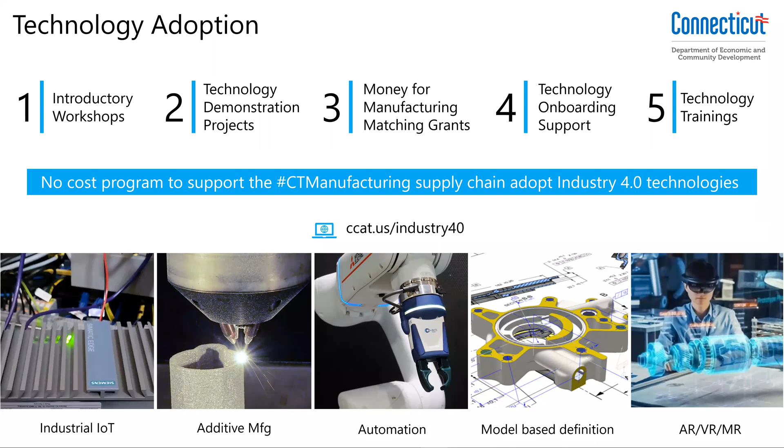Great. Thank you, Nasir. Thank you, everybody. And I'm just going to really quickly go over some of these next couple of slides. We will also provide them as a follow-up, not only to everybody who's here in person, but to those of you who are online. So thanks, Nasir, and to all of the panelists, to Ron and Jackie for your comments earlier, and Walker for helping us coordinate this activity, and Shell for all her support.

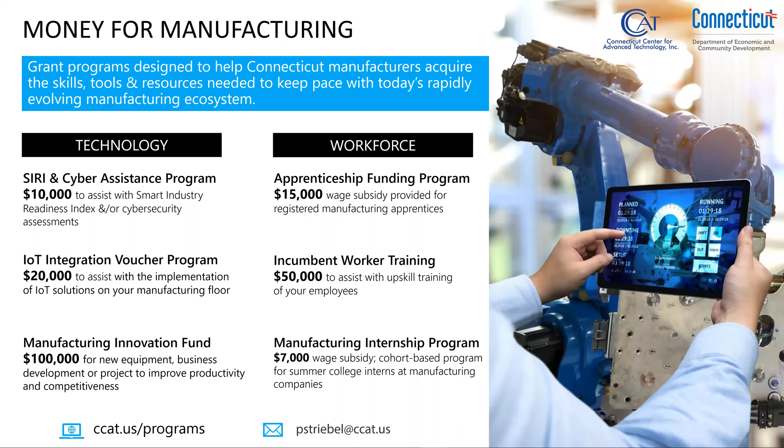So really exciting. Please be sure to not only tell the membership base, Walker, but any associates, friends, and you as vendors, think about the application of some of these funds and what you are promoting and selling to your operation, to your customer base.